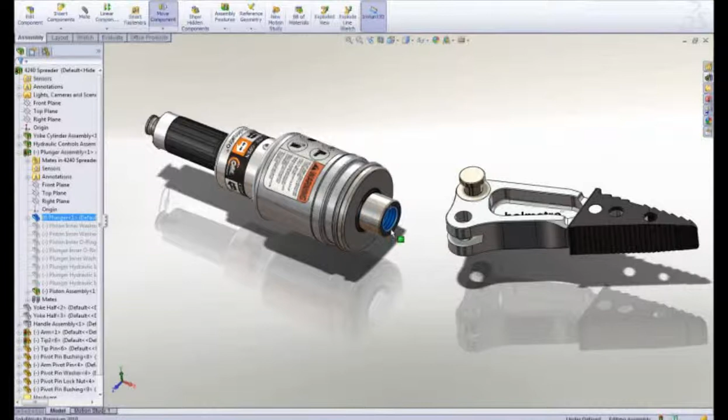Looking at this hydraulic spreader, you can see that there's some work to do. We'll create a part, assemble several parts, and create some drawings. We'll start by designing a new rod end part to connect the piston rod to the spreader arms.

The basic building block of a 3D solid model is a sketch, and sketching in SolidWorks is extremely easy and intuitive. Using a mouse gesture, I get access to my most commonly used commands. Draw a slot, add some dimensions to establish its size, and then drag the center of the slot onto the origin to locate it.

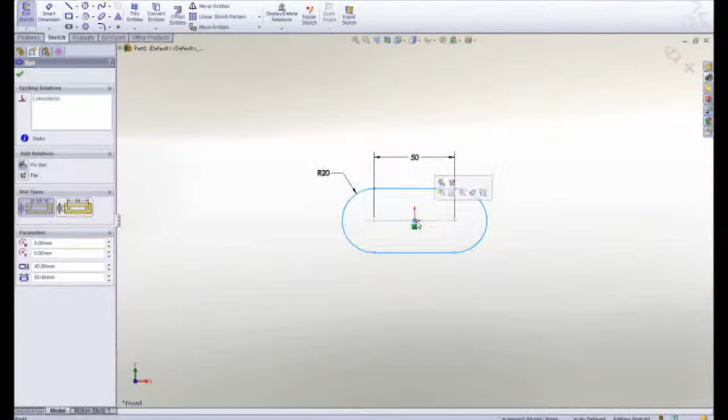Next, a rectangle is drawn using one of the many sketch tools, and then we will add a couple of circles to hold the link pins. The two circles should be the same size, so a quick window selection reveals a pop-up toolbar, and an equal constraint is added to lock their size together.

Notice that as I work, all of the commands and tools are right at my cursor. We call this our heads-up user interface, which is designed to keep your focus on the screen to make you more productive.

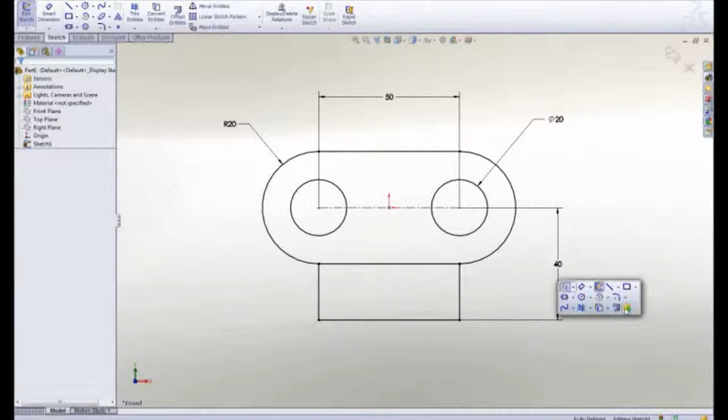Now that this 2D sketch is finished, let's make it 3D by extruding it. It can be extruded in either direction, or in this case we will extrude it 40 millimeters, about the midplane. To smooth some of the sharp corners, we can add some fillets. Their size can be graphically manipulated on screen, or we can key in a dimension to add some precision.

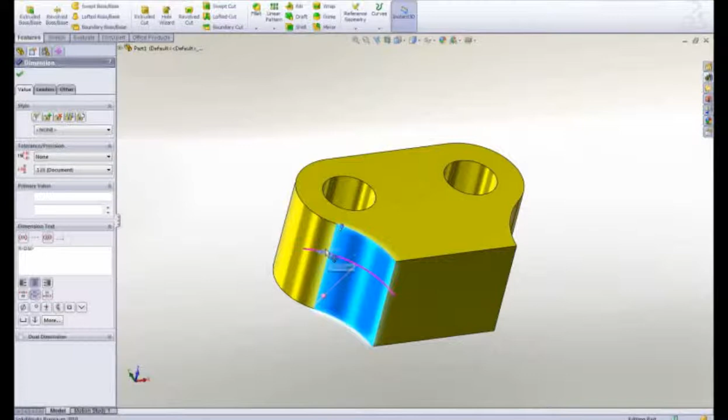Let's add a pocket to the center of the part to accept some links. This time we will use a center point rectangle to capture symmetry while we sketch, and a dimension to control its size.

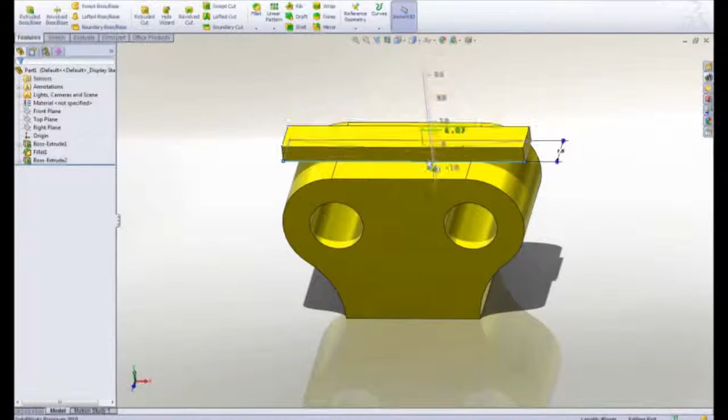Using instant 3D technology, we can add material by dragging the sketch away from the part, or remove material by dragging into the part. The sharp corners at the bottom of the pocket can be rounded by adding another fillet. 2 millimeters would be good.

Finally, we can ease the outside corners with a chamfer. Using the on-screen feature callouts, we can easily control its size while we create it.

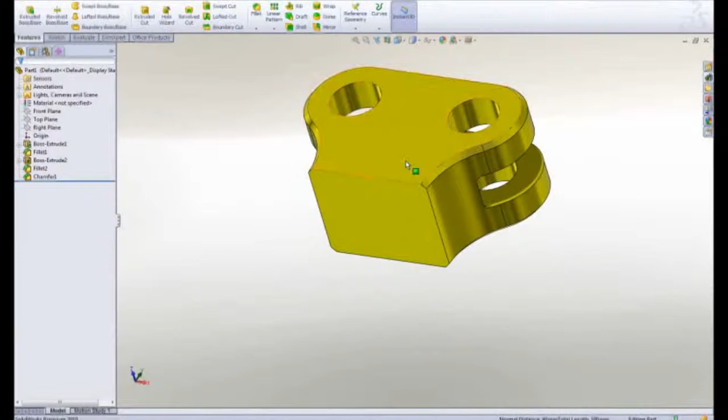Now that you have the hang of it, we will jump ahead a couple features and add a tapped hole at the bottom using the hole wizard.

Gone are the days of looking up hole data, because all of the hole types, standards, and hole sizes are available. Choose the hole parameters, locate it, and SolidWorks takes care of adding all of the proper information to define the hole.

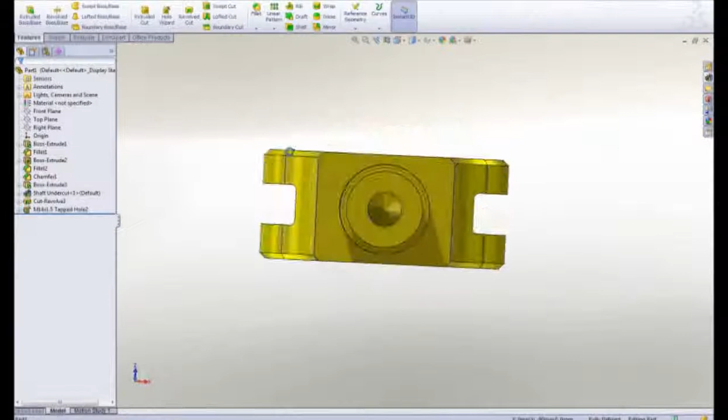Let's leverage our previously created chamfer by dragging and dropping it onto the bottom edge to make a copy. The part looks good, but maybe a couple of changes would help to refine it.

Changing the dimension value changes the geometry, and using instant 3D technology, dimensions can be dragged and we get real-time feedback of our change.

It's important that we fully describe our part beyond just the geometry. Properties such as part number or description can be added and leveraged later in the drawing title block and BOM.

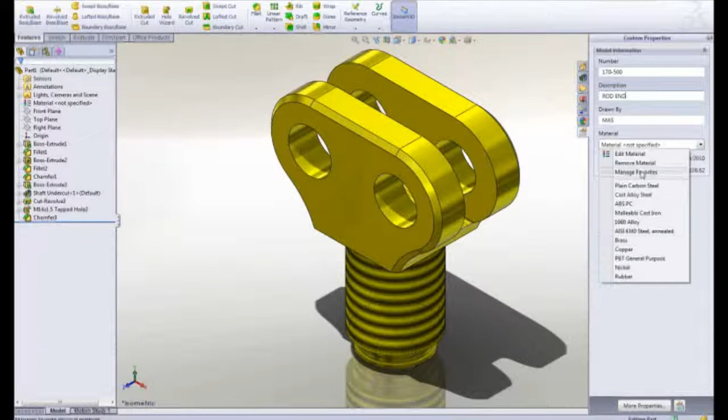Materials can be applied from a list of favorites or from a broad database of materials. All visual and mechanical properties are applied. Notice that the weight of the part has been updated to reflect the new material.

To document our design, let's create a drawing. SolidWorks displays the default views of the part in the View palette. We simply drag a view onto the sheet, then we can create any desired projected views, including an isometric.

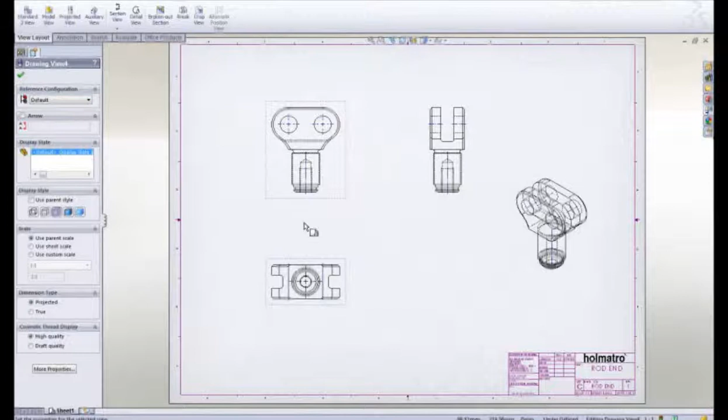Hidden lines can be removed or views can be displayed as shaded. For this part, it would be desirable to create a detailed view of the area near the bottom for clarity.

Adding dimensions is simple. All of the dimensions that were used to create the part are available to be placed on the drawing. Since symmetry was used during design, we can add a couple dimensions to locate the round boss at the bottom. The Rapid Dimension Manipulator appears to properly place and space the dimensions at even intervals.

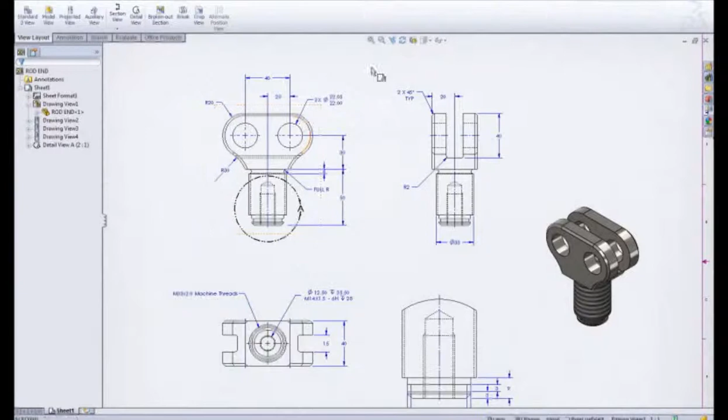Selecting a dimension, we are presented with a dimension palette where we can add more definition, such as tolerancing or formatting. These 20mm holes will not accept the 22mm pins we will be using. No problem—making this change right here on the drawing will update all of the views and change the part as well.

Let's move on to do some assembly work, and with SolidWorks it couldn't be any easier. For our rod end, simply drag the round boss and drop it onto the cylinder rod. This adds a concentric assembly mate between the parts. To position it along the axis, we can drag the edge of the rod end to the end face of the cylinder rod to add a coincident mate.

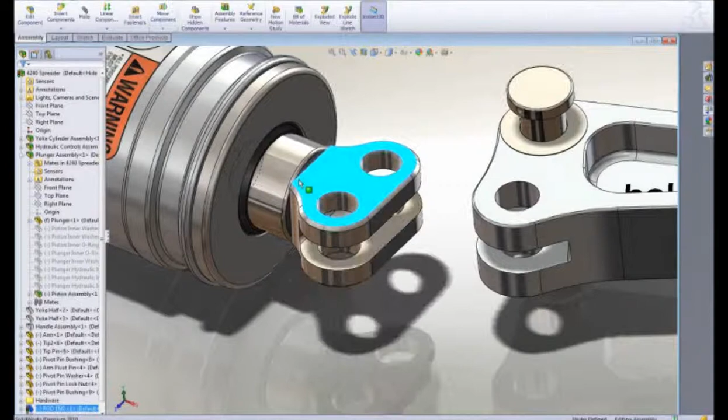Next, we will add a link to stop it from rotating. To find this part, we enter 'link' in the search assistant. SolidWorks not only returns components with link in their file name, but also digs into the part properties to find the term. As before, we can drag this link from the search pane and drop it on a circular edge of the arm to locate it, then using the same drag-to-mate technique, hook it to our rod end.

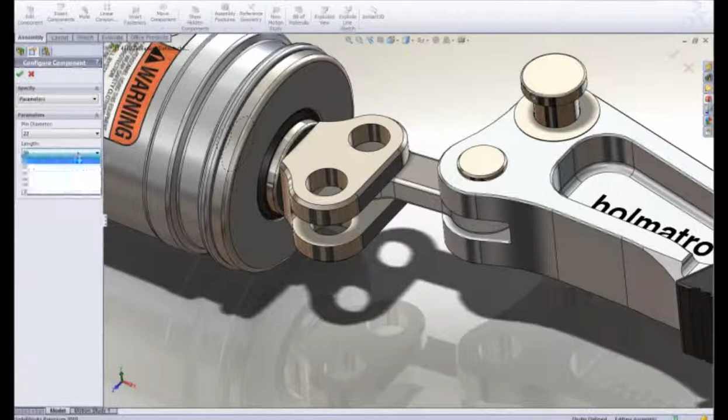From the same search pane, we can assemble the pin. This pin was modeled for multiple uses and contains many sizes or configurations. We simply choose the diameter and length desired, and SolidWorks builds the part to specification.

Most assemblies contain many hardware items like screws, nuts, washers, and the like. SolidWorks provides a toolbox of such items, containing thousands of parts with millions of configurations for your use. Notice that as we assemble the snap ring, it automatically sizes itself to the shaft on which it's placed.

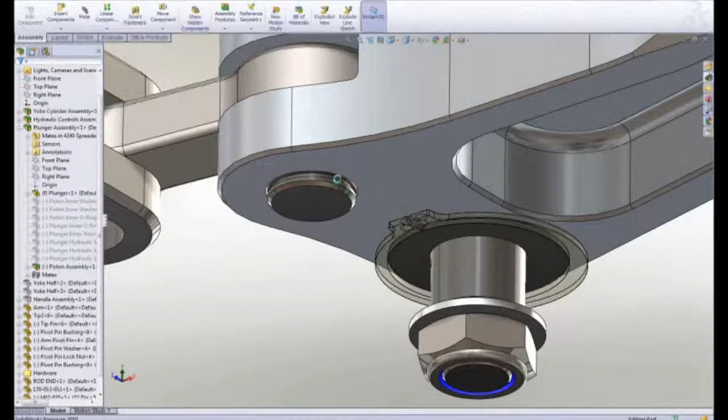SolidWorks allows us to copy parts along with their mates, which is a big time saver. Simply identify the hole and mating face for each hole where the pin is to be placed.

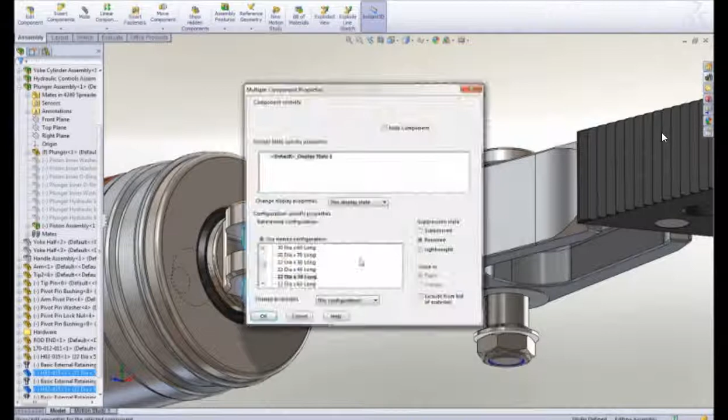As you can see, these pins are too long for the rod end. Remember, the pin was modeled in multiple sizes, so we can easily change the length of just these two without having to reassemble.

Interference detection is an important aspect of 3D design, and SolidWorks takes it a step further with real-time collision detection. Notice that as we move the arm through its range of motion, it interferes with the link. SolidWorks provides both visual and audible feedback of the collision.

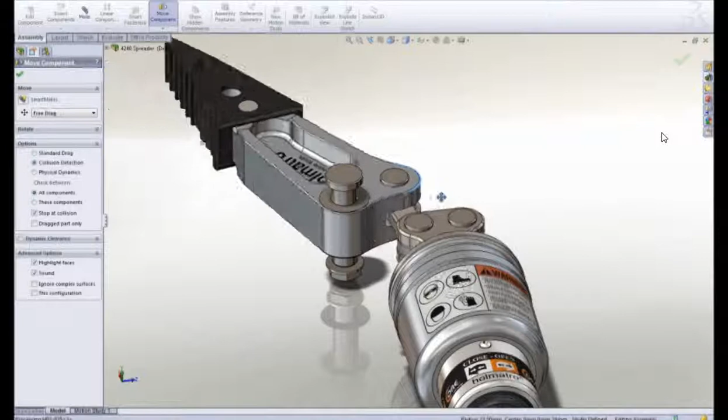A change is in order, and it can be done directly on the part right here in the assembly by changing the angle dimension defining the pocket on the arm. Now, as we recheck for collision, we can see that we have full range of motion with no interferences.

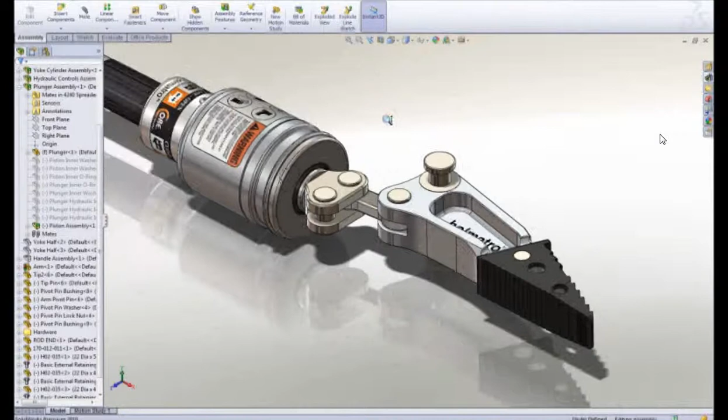Half of the spreader is complete, and we can save assembly time by mirroring the parts about the central plane to the opposite side. SolidWorks allows us to verify and change the position of each part, and even to create opposite-hand versions of individual parts.

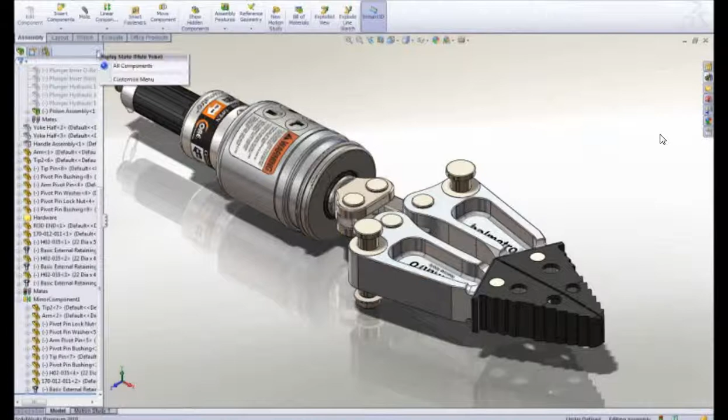In just two minutes, 19 parts were added to this assembly, and our assembly task is complete. Let's turn on the parts we previously hidden and document this assembly.

We'll wrap up the demonstration by creating an assembly drawing. As we did when creating the part drawing, we can drag the required views onto the sheet. To better describe this spreader, we will use an exploded view of the assembly.

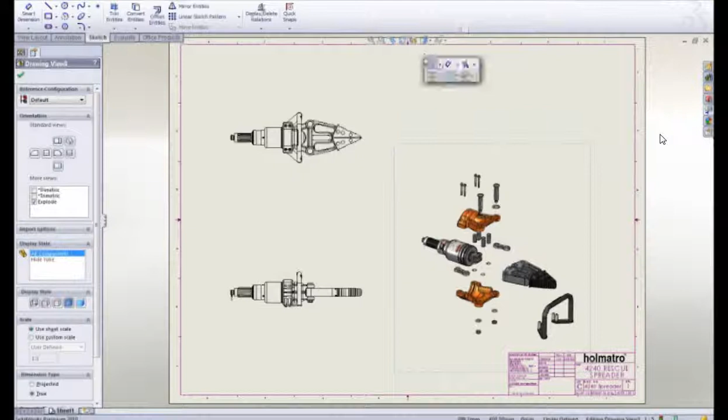No assembly drawing is complete without a bill of material. SolidWorks itemizes the parts, extracts information like description, and adds the appropriate quantities. No bill of material is complete without balloons, and they can be added automatically.

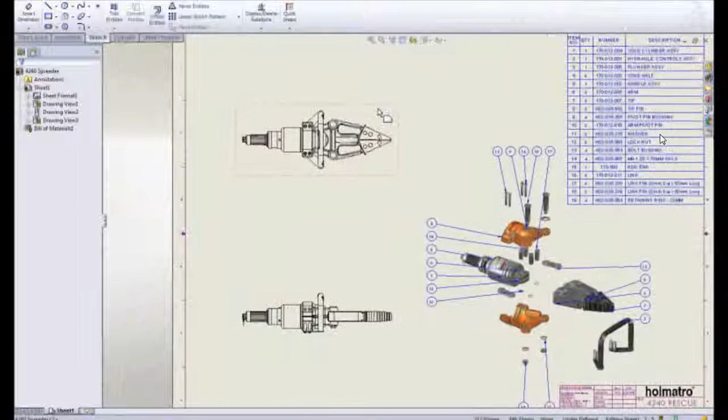To depict the motion of the spreader assembly on a 2D drawing, we can add an alternate position view to describe the assembly in both the open and closed positions. Add a couple of reference dimensions, and our assembly drawing is complete.

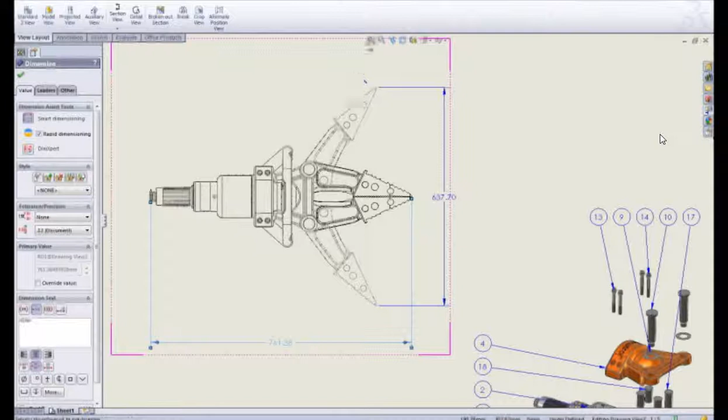We strive to deliver simple but effective tools to help you design better products faster. When you have an idea for a great product, SolidWorks provides the tools to design it in less time and at lower cost. This has been your first look at SolidWorks. To learn more, contact your local SolidWorks reseller or explore our website for more information.